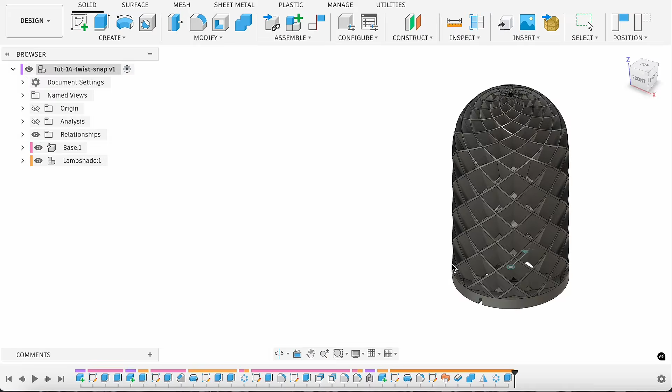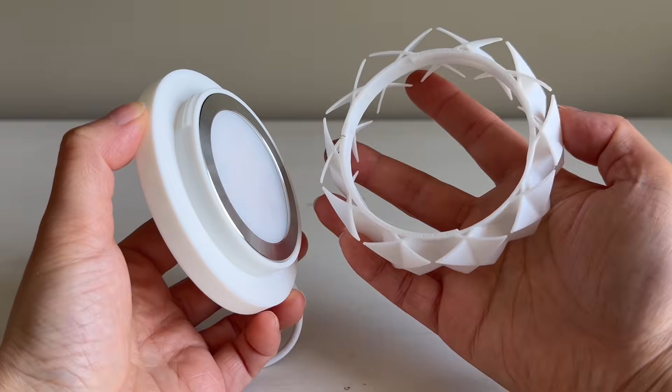Today we're going to model a twist snap mechanism. It can be used for twist snap containers, or we can use it to join the lampshade and base from our last video. This tutorial is a bit longer than usual because we're going deep, not just on the mechanism itself, but also on adding cooling holes and cable management to create a truly functional lamp base. I'll also break down the difference between paste and paste new and show you how to build the as-built joint to get it all moving. Okay, let's dive straight in.

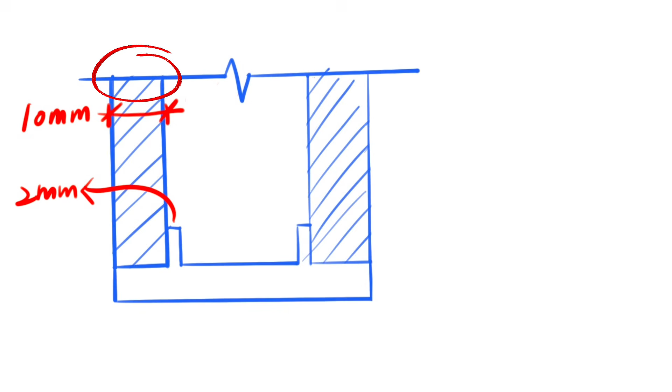First, let's take a look at the design. The plan is to place the LED directly on the base. I'm using a 2 mm wall thickness here, and this is where the shade goes with a 10 mm thickness. So the total shade diameter will be the LED diameter plus 24. Now we'll input these into the parameter table, which makes it super easy to adjust everything later.

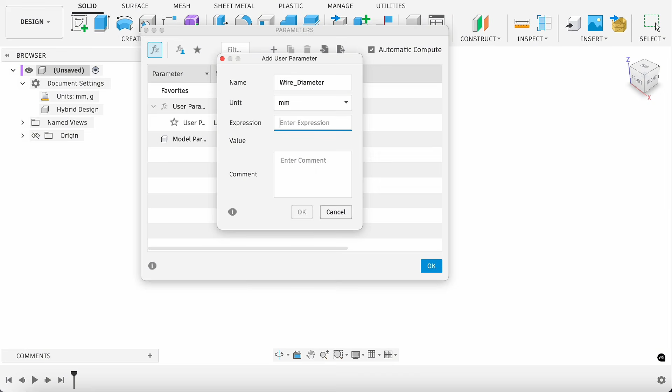Go to the Modify panel and select Change Parameters. Click the plus icon to add our first one, light diameter. Let's set it to 30 mm. Next, we add wire diameter set to 2 mm. And the last one, the shade diameter, input light diameter plus 24.

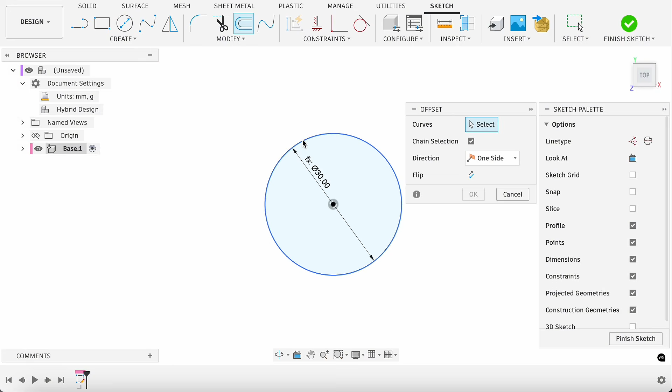To better manage our resources, let's start by right-clicking the root component in the browser and select New Component, name it Base. Create a sketch on the XY plane. Press C for circle, snap to the origin, then type in light diameter. We'll offset this circle, 2 mm for the LED wall, another 2 mm for the interface, and one last offset of 10 mm for the lampshade.

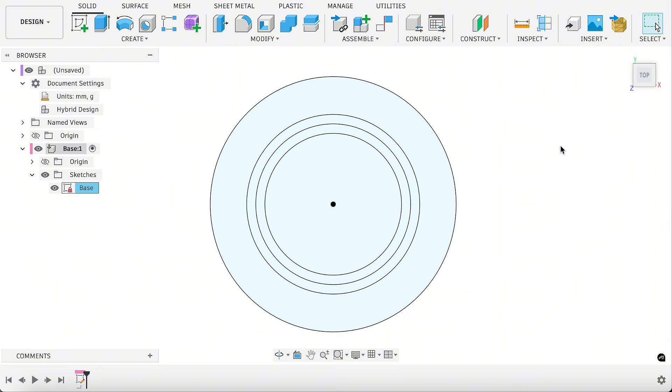Finish the sketch and rename it to Base. Trust me, naming your sketches is a great habit. Spending 1 minute here will save you tons of time later. Hit E to extrude. Select the entire circle. Pull it up by 8 mm.

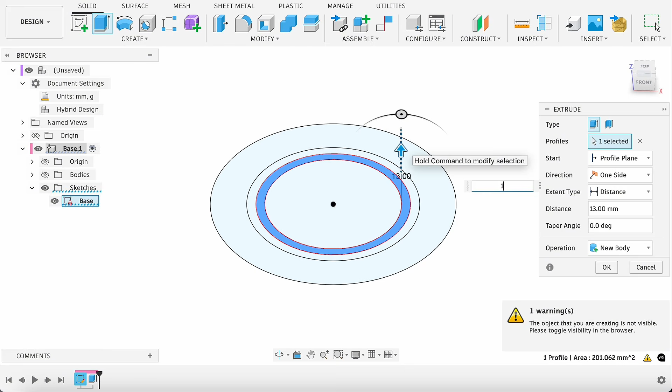Now, turn that sketch back on and use E to extrude again. Select this ring this time. Pull it up by 13 mm and set the operation to join. This is our base body. Let's rename it to base.

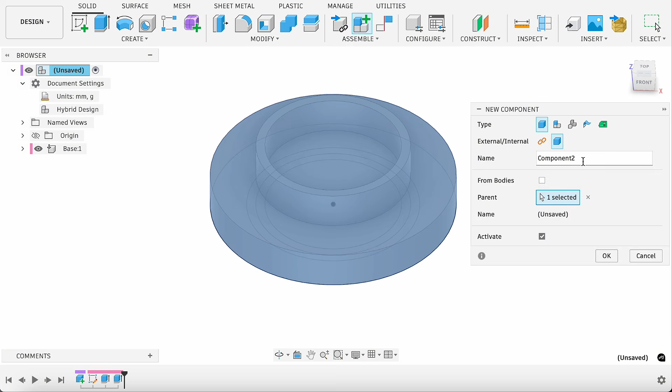Now we'll create a new component to hold the lampshade and its connector. Right-click the root component in the browser and select New Component. Rename it to Lampshade. Hit E again, but this time, select this middle ring, set the start to object, and pick the top face of the base. Extrude up by 8 mm with the new body operation. Okay, let's rename it to Fitting.

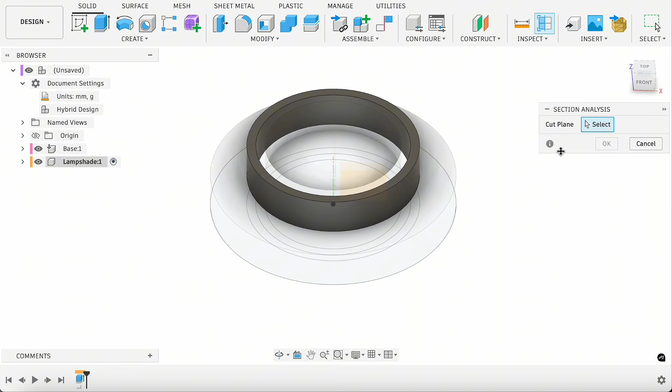To get a better look at the model, let's go to the Inspect menu and select Section Analysis. Pick the XZ plane as our reference. If you don't see anything, just click Flip. Right now, these two parts are just sitting face to face. Next, we're going to build the actual twist snap mechanism.

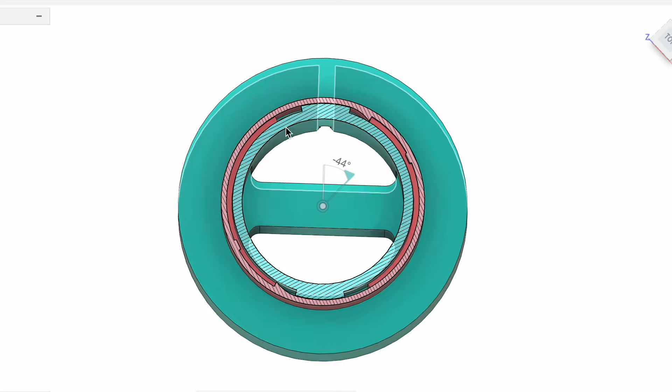Before we go any further, let's see how this twist snap mechanism actually works. First, we have a radial lug on the base part. During installation, you align this lug with the entry slot. Since the slot is slightly wider, it slides right in. Then, as you rotate, the lug follows a curved path until you hit a tiny bump, a detent. With a little extra force, the plastic flexes just enough to let the lug snap over it.

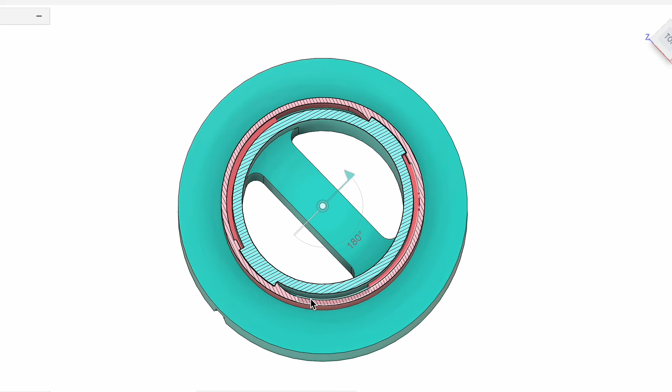The moment the lug snaps past that point, you'll get clear tactile feedback. That's the click sound we're looking for. Once the lug snaps into the locking zone, there's a much higher hard stop wall right in front of it. This wall is too high to be pressed over with normal force, so the lug can't rotate any further, effectively locking it in place. All right, I'll keep this diagram on the side as a reference, and let's start building it by creating the lug.

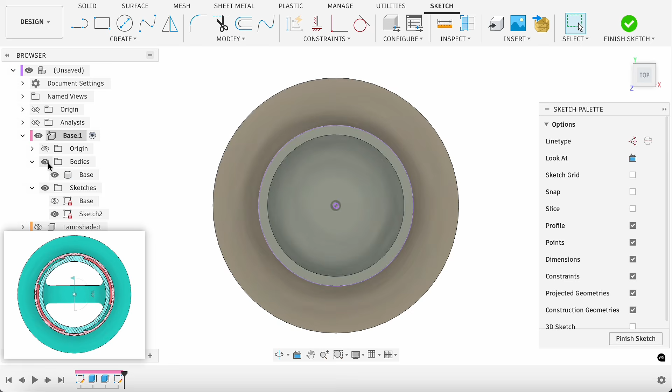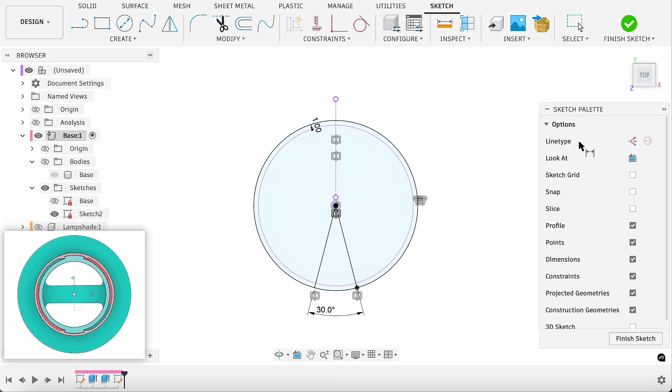Create a sketch on the top face of the base body. Use shortcut P to project the outer edge. Now offset the outer circle by 1 mm. Draw a line from the origin and mirror it across the y-axis. I'm using the shortcut D to set the angle to 30 degrees. Okay, here is our little lug. Now, everything looks fully defined. Okay, let's finish the sketch and rename it to lug.

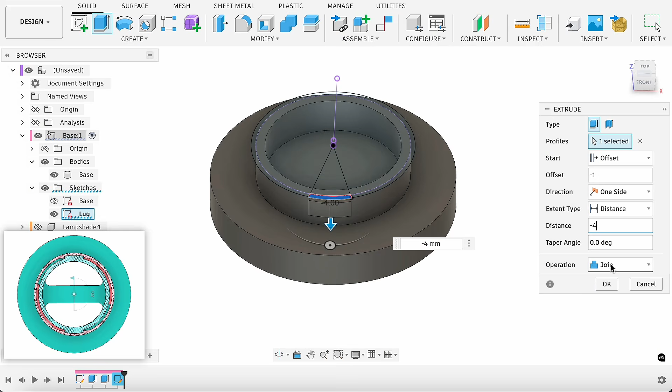Hit E to extrude this profile. Set start to offset, -1 millimeters, and the distance to -4 millimeters. This is our lug height. Set it to join so it merges with the base. To avoid overhang issues, I'm using the chamfer tool on these two edges. Give it a 1 millimeter chamfer. Okay.

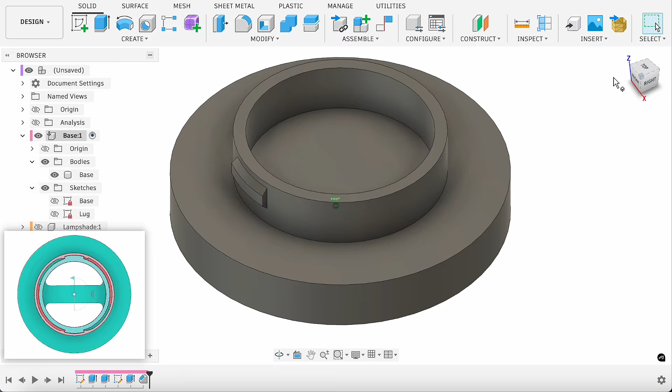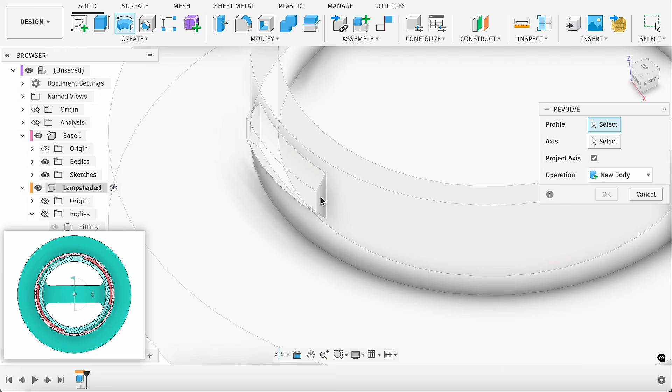Now, switch over to the lampshade component in the browser. We're going to cut a groove into the fitting body. Let's use the revolve tool. Hide the body for now, so we can pick the side of the lug as the revolve profile. And pick the Z-axis as the revolving center. Set it to full and operation to cut. Just be careful here. Don't forget to hide the base component first so we don't accidentally cut the lug itself.

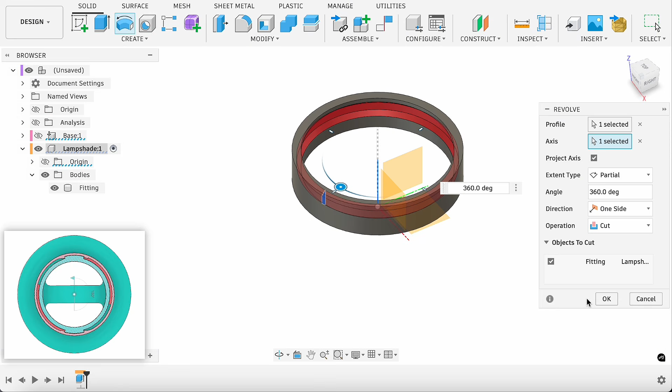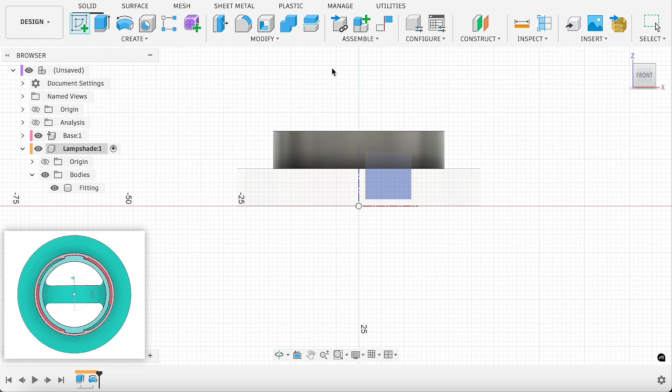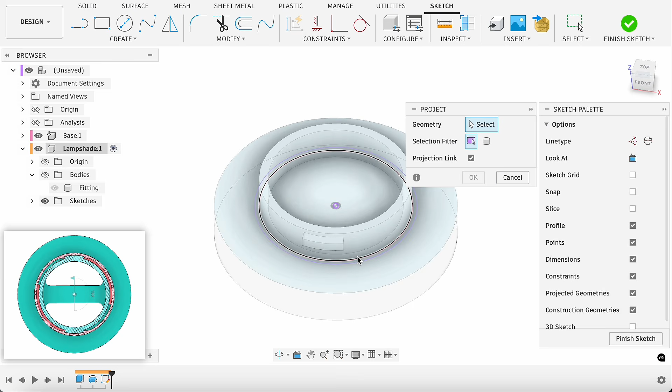The lug has room to move now, but it needs an entry slot to get started. Plus, we're still missing the hard stop here and the detent right here. Create a new sketch on this face. Hit P to project the groove. Hit P again, show the base again. And project the top face of that lug as well. We need these projection lines as our reference. We'll draw the entry slot and the hard stop first.

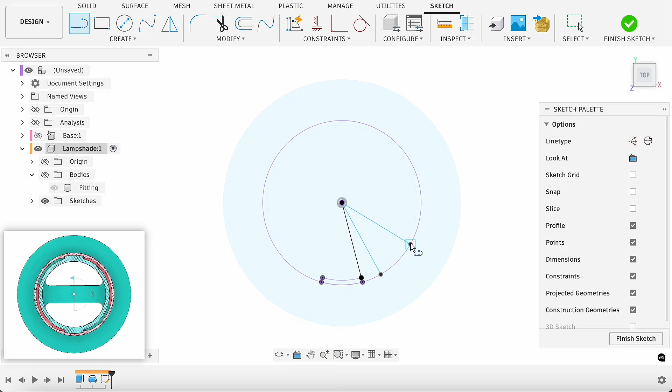Draw 3 lines from the center. This point is the hard stop. Here is the tangent point of the entry slot, and this is the end of the entry path. Use shortcut X to make this one a construction line. Use shortcut D to set this angle to 15, and this one to 45 degrees. Now, let's draw an arc using the center point arc tool. And use a coincident constraint here. Since our lug is 30 degrees, this 45-degree opening is plenty of room.

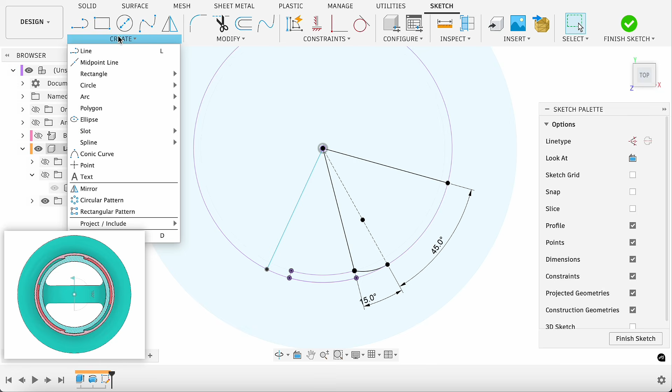Next, we're going to draw the detent. Draw a line from the center to the edge. Then use the center point arc to snap to the center and draw a short arc. Make it coincident with this line. Then hit D for dimension. Set the width to 2 millimeters and the height to 0.4 millimeters.

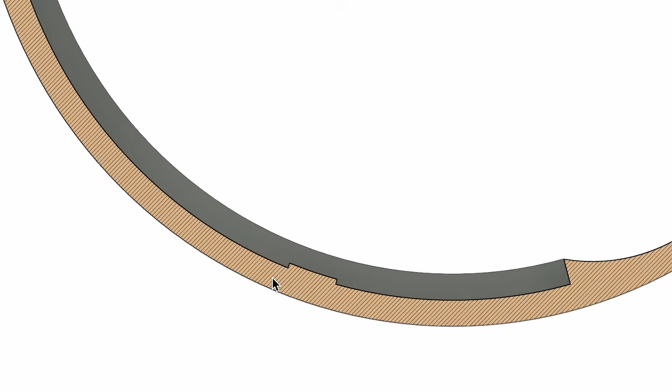This height value is key. If the detent is too low, it'll twist in too easily, but it might be too loose to stay locked. If it's too high, it'll be hard to twist. You might need way too much force, or it might not clear at all. Based on my testing, 0.4 works just fine, but you can always adjust this to fit your own project.

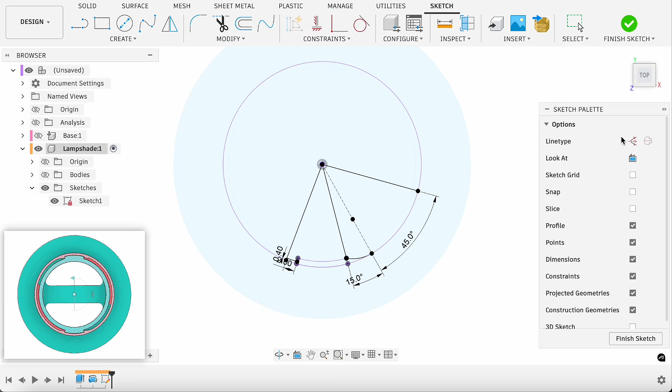Before finishing, check for that small lock icon. It means it's fully constrained. If your lines are still blue, they're under constrained. We want this logic to be rock solid, so it won't break when you adjust parameters later. Okay, let's finish the sketch and rename it to Twist Snap.

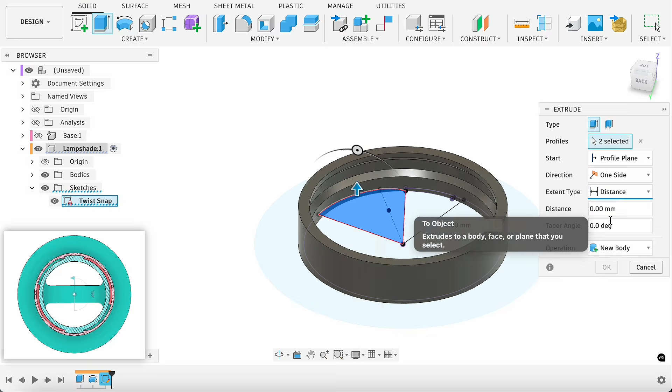Now, hit shortcut E to cut the entry slot. Select this profile, toggle the body back on, set the extent type to object, and select this face. Make sure the operation is cut and the base body is hidden so it won't be cut by accident. Okay, now our lug can enter the groove from here.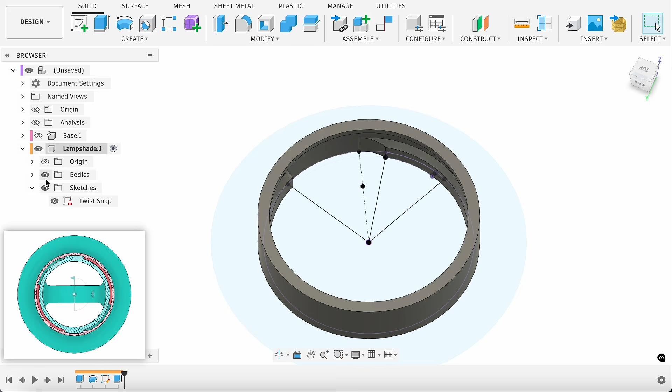To add the detent and the hard stop wall, let's hit shortcut E to extrude again. Select the small bump and the end profile. Set the start to object, select the top face, and use join. Now we've got a working twist snap.

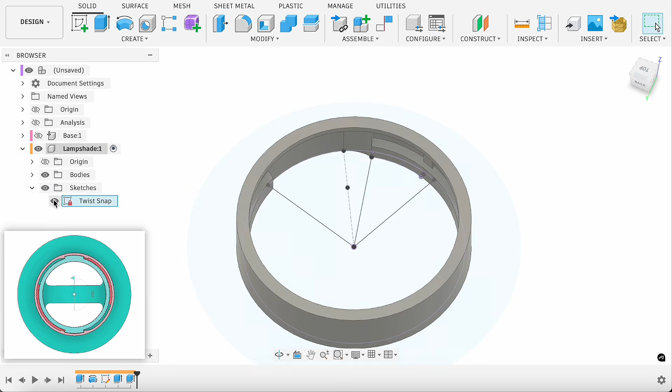But if we stop here with just one single lug, we're asking for trouble. Think about it. The entire weight of the shade and all that torque you apply when twisting it on would be concentrated on one tiny point. That lug would basically act like a pivot, making the whole shade tilt and wobble, and after a few uses, it's probably just going to snap off. To fix that, we need to balance the load.

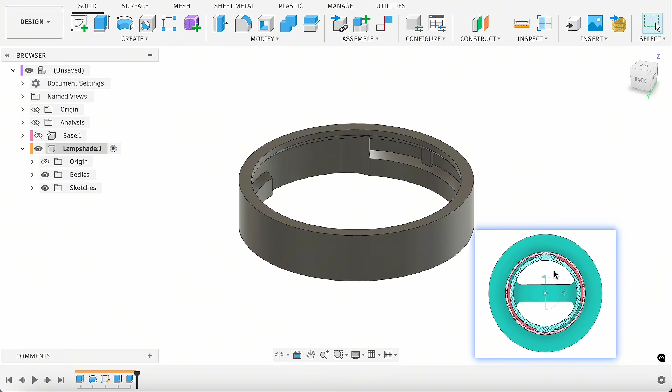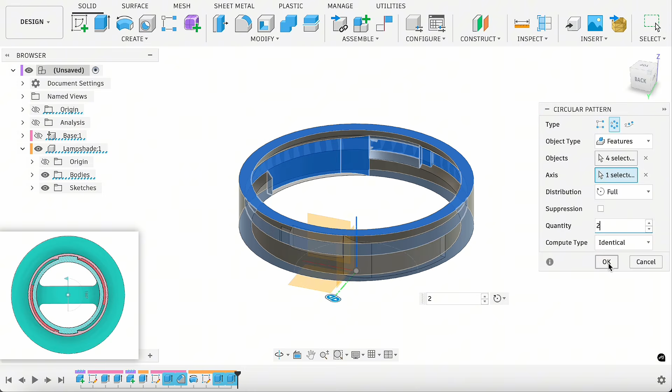Let's head up to Create, then Pattern, and grab the Circular Pattern tool. Make sure your object type is set to Features, because we want to grab those specific steps from our timeline: the steps that create the entry slot, the hard stop, and the detent. Pick the Z-axis as your center. And set the quantity to 2. Just like that, we've doubled our strength. Now, instead of one point taking all the stress, the load is perfectly distributed.

To get a better look at the twist snap mechanism, let's go to the Inspect menu and select Section Analysis. Pick the XY plane and drag it up.

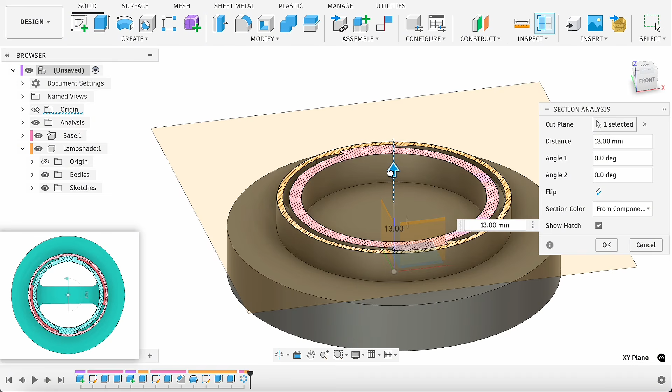For a lightweight project like this, 2 lugs are plenty. It's clean, symmetrical, and gets the job done. Of course, you could always crank up the quantity in that circular pattern to 3 or 4, but honestly, 2 is just enough.

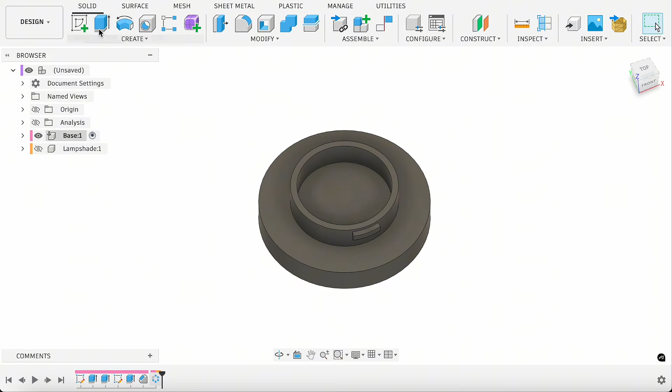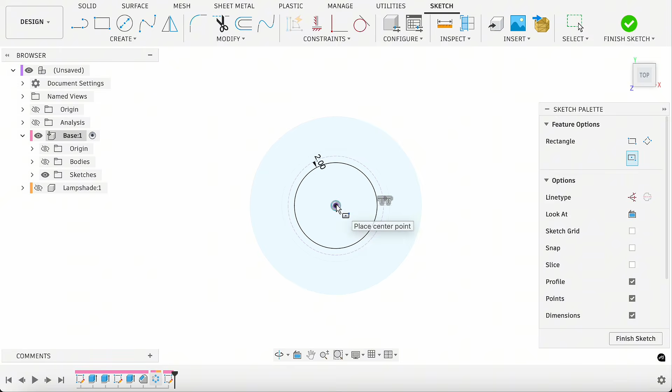Now, let's add some utility features. We'll start by sketching the cooling holes. Hit P to project that inner wall so we know our boundaries, then hide the body to clear the clutter. Hit shortcut O to offset it inward by 2 millimeters. Grab the rectangle tool, specifically the center rectangle, snapping it right to the origin. And hit D to set the height to 6 millimeters.

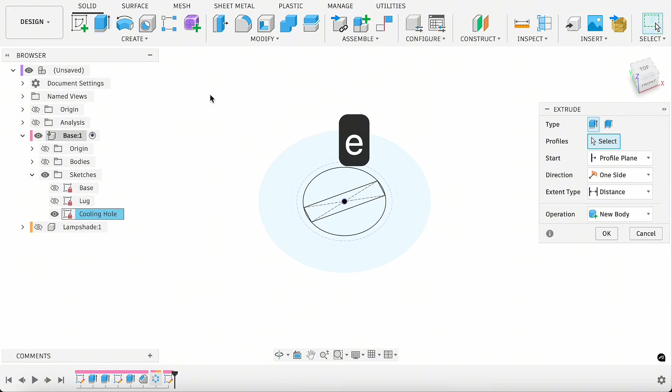Check if it is fully defined here, the small lock icon. Okay, finish the sketch and rename it to cooling hole. Next, hit E for extrude and select those 2 semicircles. Set your extent type to all. If nothing happens, just click the flip button. Also, make sure the operation is set to cut. Hit OK, and there we go. 2 vents to keep things cool.

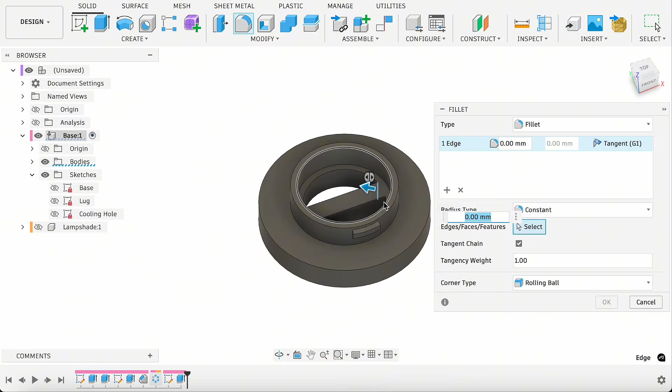To give it a more finished, professional look, hit shortcut F to use the fillet tool and add a 3 millimeters radius to these sharp base corners. Now, we need some space for the power cable. Create a new sketch on this side face.

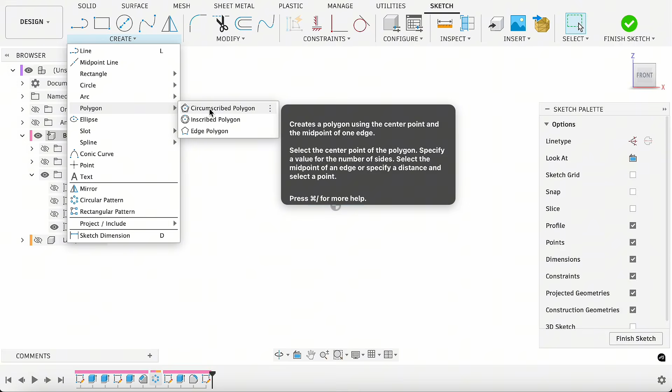Instead of a circle, we're going with a circumscribed polygon. Why? Because when 3D printing, circular holes always sag at the top, and a polygon gives us a much cleaner bridge, so the cable actually fits. I'm drawing an octagon here and adding a horizontal constraint to this edge. Here is a tiny bridge, and since this edge sits at a 45-degree angle, we won't have any overhang issues to worry about.

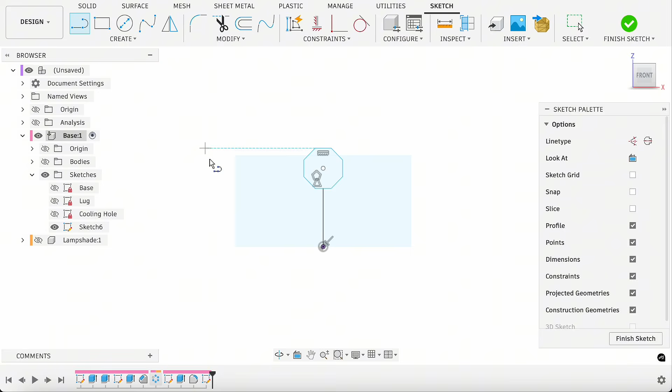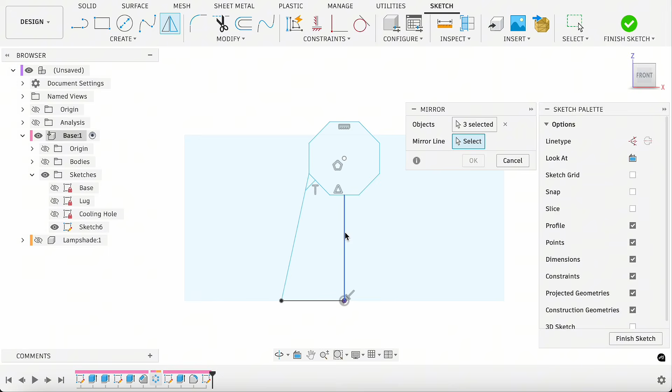Draw a construction line from the center of this edge to the origin and lock it to vertical. Sketch out the rest of the profile. You may wonder why I'm adding this tiny protrusion. I'll explain why in a second. Let's mirror everything to the other side. And hit D to get the dimensions right.

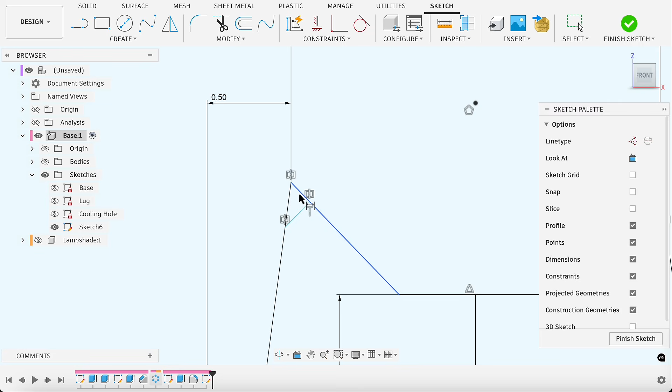Set the size to wire diameter plus 0.2. 0.5 millimeters for the gap. Here, a height of 3 millimeters. And 0.2 for the bump width. We want the bottom a bit wider so the cable slides in easily. That little bump is there so you have to give it a tiny push to snap it in. That way the cable doesn't just fall out when you move the lamp.

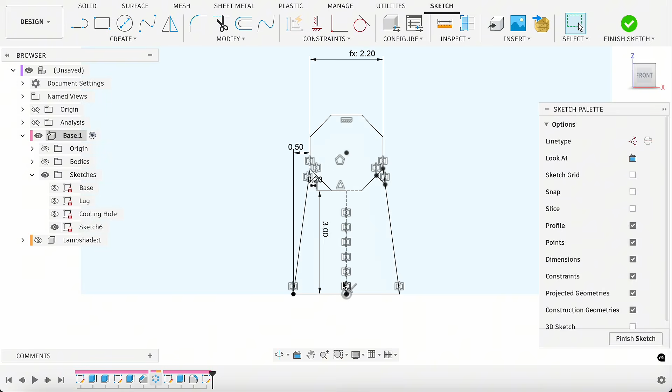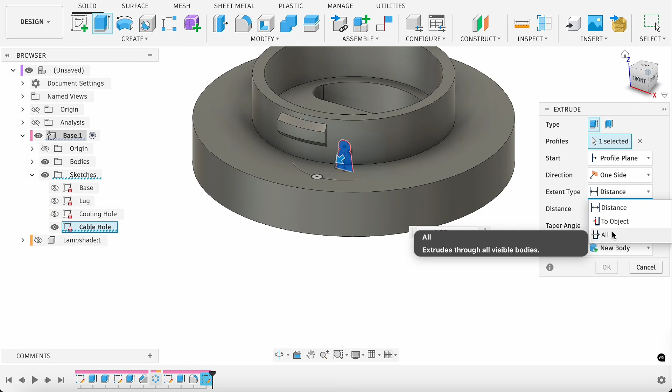Finally, I'm using the shortcut X to turn these two lines into construction lines, so it'll be easier to select the profile later. Now it's fully defined. Okay, let's finish the sketch and rename it to cable hole. Now, hit shortcut E, grab the profile, set it to all, flip the direction if you need to, and make sure it's a cut. And that's cable management done.

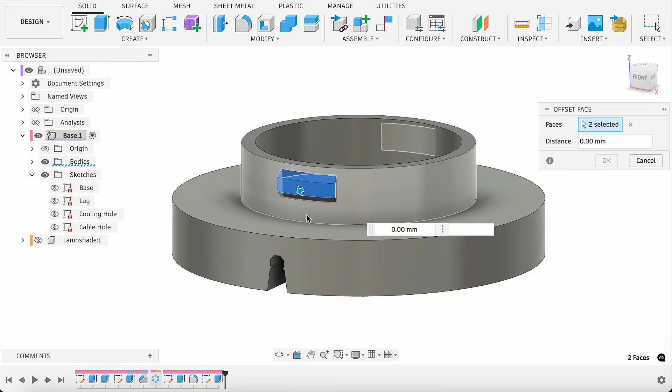For the final touch, we'll get to tolerances. We need a bit of breathing room for the base and lampshade to actually fit. Grab the offset face tool or hit shortcut Q. Select the lug and the mating surfaces and enter negative 0.1 millimeters. Do the same for the base where the LED sits, also a negative 0.1 tolerance.

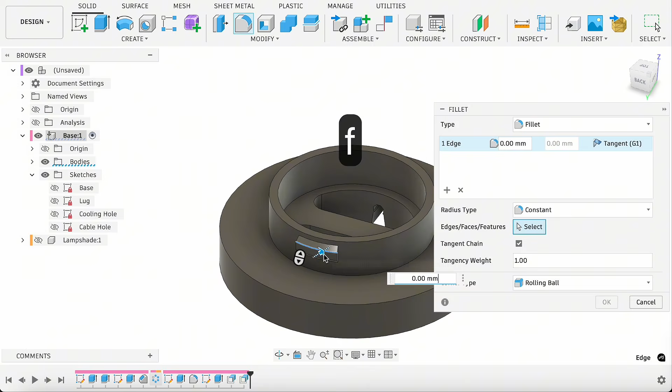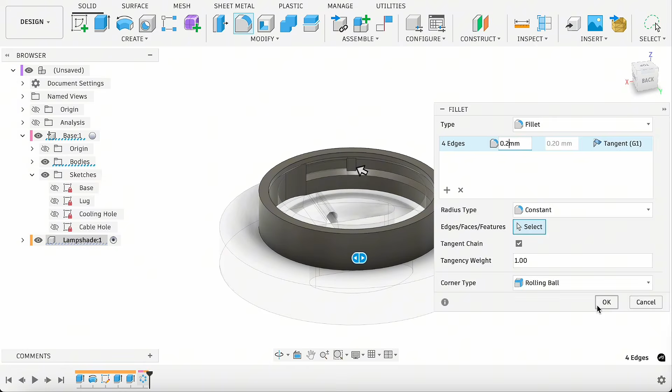Then hit F for fillet. Add a 0.5 millimeters fillet to the lug edges to make it glide easily in that groove. Use fillet again. Add a tiny 0.2 millimeters radius to the detent to help the lug glide over the bump. And just like that, our twist snap mechanism is finished.

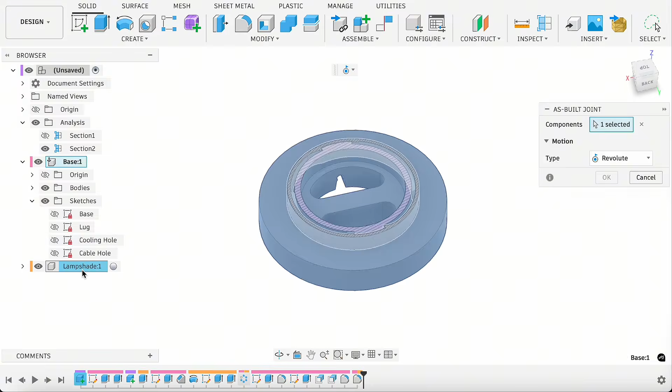Let's see if it works. Go to Assemble, select As-Built Joint, and pick the base and the lampshade. Set the motion to revolute and pick your center axis. Now try dragging the fitting body. If it's acting stubborn, just go to the Select menu and make sure Component Drag is toggled on.

As you rotate, the lug follows the groove until it hits a small bump. With a little extra force, it snaps right over that detent with a satisfying click. Now it's in the locking zone, stopped by a higher wall and locked perfectly into place. It works just as we expected.

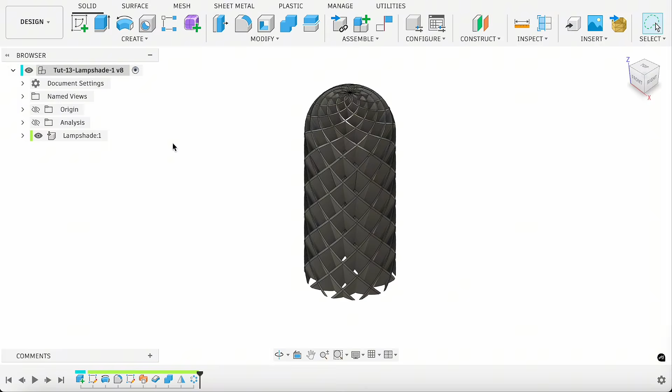Finally, let's bring in the twisted lampshade we made in the last video. Copy the component and right-click. Make sure to select Paste New. Here's the deal. A regular paste creates a linked instance, so if you change one, you change them all. But Paste New gives us a completely independent copy.

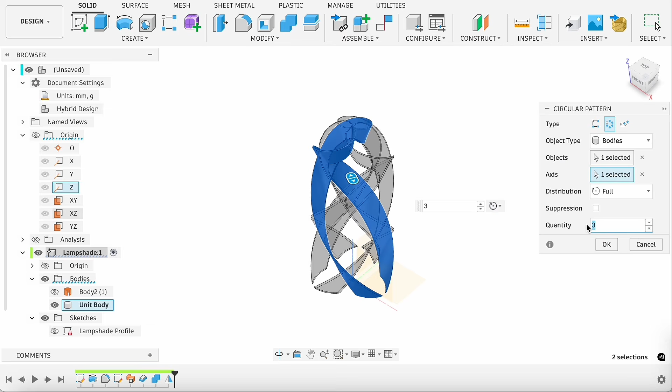If you missed our last video, no worries, you can just start a new component, follow that tutorial, and model the shade from scratch right here. Okay, back to our modeling. Now, inside this component, we have our connector fitting and the lampshade subcomponent. Together, they make a perfect one-piece parametric lampshade with a built-in twist lock.

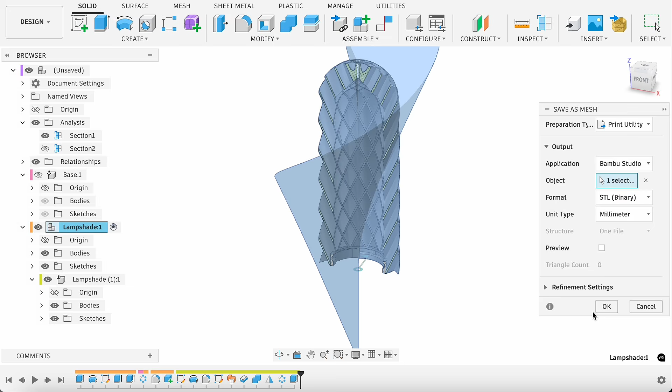You may also notice that we haven't merged all the separate bodies, but don't worry, this won't affect the print at all. Sending these independent bodies to your printer works perfectly fine, as long as you don't manually split them in the slicer. Wait a second, look at here. There's a mismatch between the base and the lampshade. If we head back into the parameter table, you'll notice some new parameters have popped up. That's just the parameters that came along with the component we just pasted.

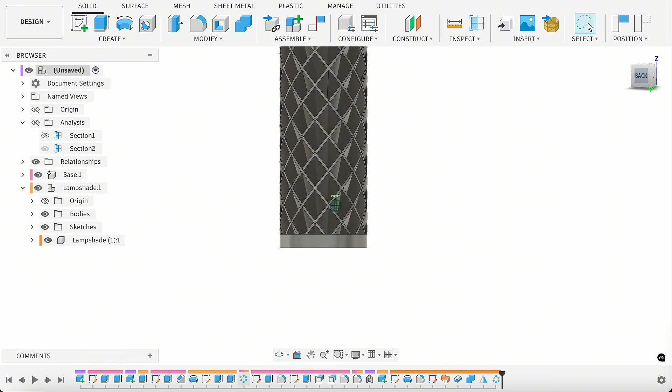To make sure the base and the shade stay perfectly in sync, we're going to drive this new diameter 1 parameter using our shade diameter variable. Just type it in and they're locked together. And I'm deleting the new diameter 1 parameter since we're not going to use it anymore. Now they're perfectly aligned, and they'll stay that way even if we change the parameters later. Let's take another look with the section analysis.

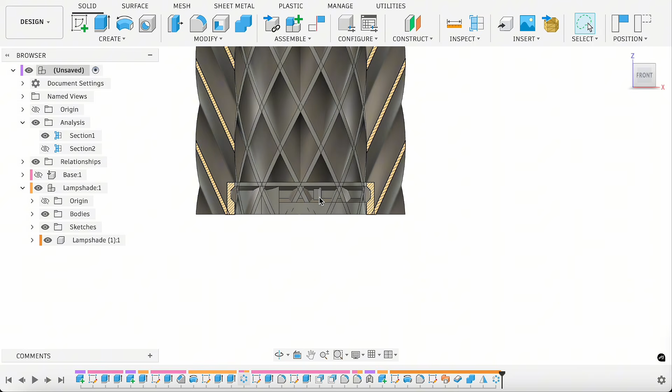If we zoom in here, you can see the inner wall of the shade is actually crashing into our connector's internal structure. It's a bit of a mess, so let's clean that up. Turn that sketch back on. Hit E to extrude. Select these profiles, and for the extent type, set it to object.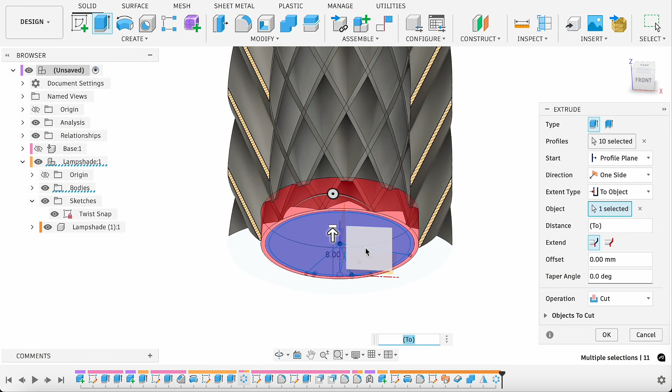Pick the top face of the fitting body, and don't forget to hide the fitting body now so we don't accidentally cut into it. Make sure the operation is set to cut, so we're only trimming the shade bodies. Okay, let's bring our fitting body back on. It looks all right now. Just like that, we've built a fully functional parametric lampshade with a built-in twist snap interface.

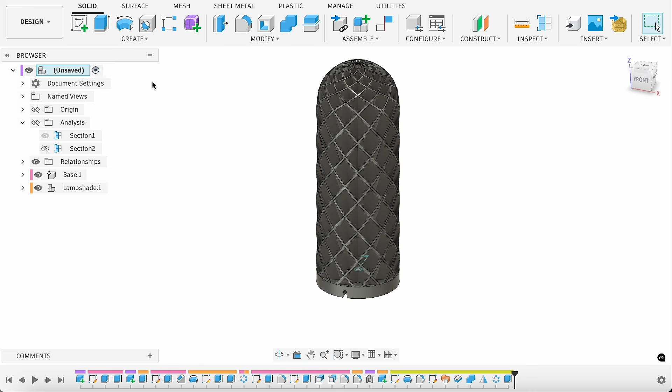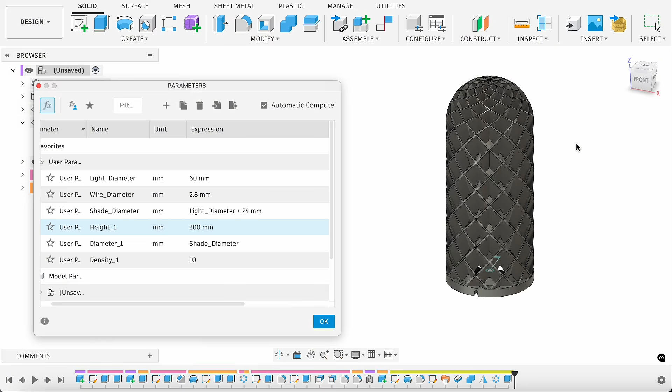Now I'll input the actual size of my LED. Open the parameter table, change the light diameter to 60 millimeters, and the wire diameter to 2.8 millimeters. I just measured it with calipers. It's looking a bit short, so I'll just bump the height up to 200. Everything scales perfectly without breaking a single feature. Now, all that's left is to export these two components and send them to the printer.

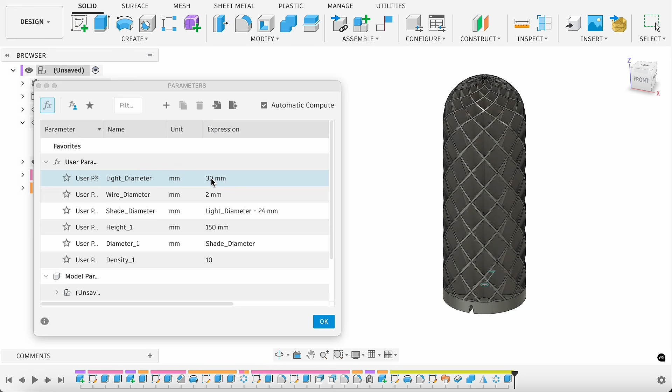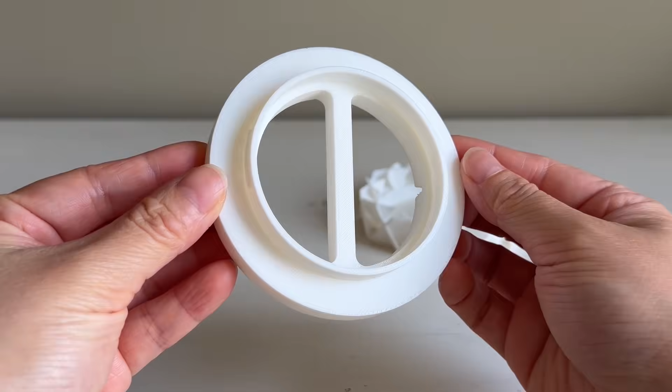Okay, send to print. Here's the final print. I've already printed the full lampshade in the last video, so I only printed a small section of the shade this time to quickly verify the mechanism. Let's look at the base first. Here are the cooling holes and the cable port.

Let me slide the wire in and seat the LED. Give the cable a little push to snap it into this slot. Now you can see, even with a bit of a pull, that wire isn't going anywhere, so no more annoying cables falling out. Now here's the shade, well, a small section of it. For the assembly, align the lug with the entry slot.

And rotate. Right here, I'm feeling a bit of resistance. That's our detent. Give it a tiny bit of force, and with a satisfying click, it locks right into place. Let's see it with the light on. Now I'm actually regretting not printing the full shade.